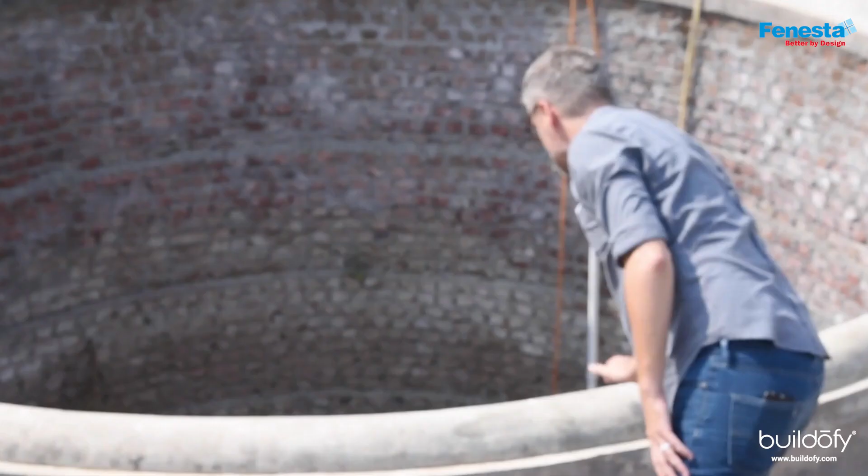One of the first decisions we made was to formalize that into an open well, not just to take the spring water that was coming along, but also to use that as a catchment. We implemented recharge pits throughout the site to help recharge the water table, and the more capacity we could build throughout the year to hold that water, the easier it would be on our resources.

We've actually been able to implement another massive rainwater harvesting pit that exists below the soccer field.

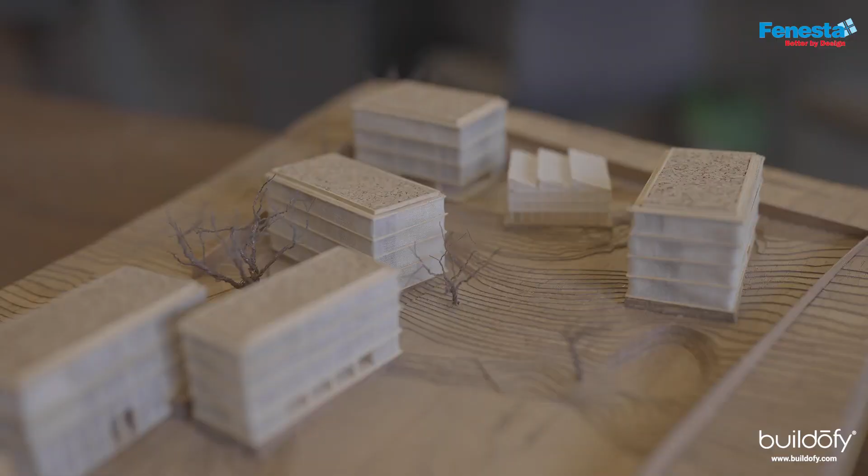What we worked out was a series of buildings that would sit, again as much as possible, following the natural contours of the hill, and the reason for that was to try and maintain as best we could the natural slope.

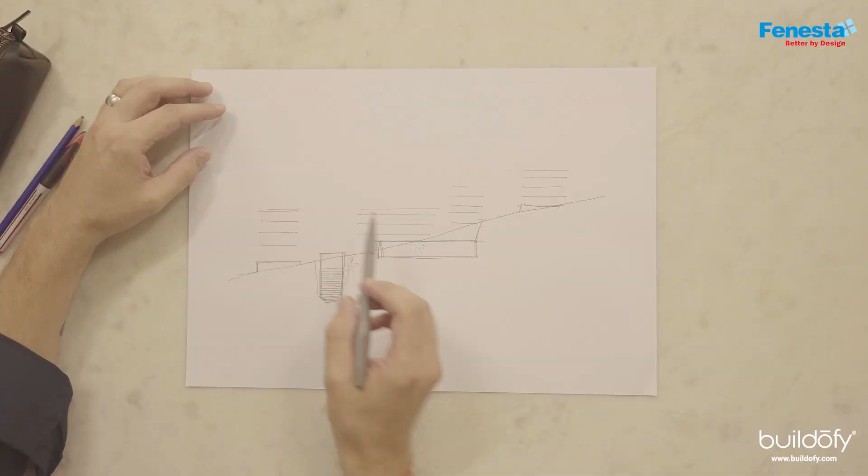Bedrock foundation of the site is fairly close to the surface, so any excavation we had to do was quite expensive.

The aspirations they wanted to accommodate greatly exceeded the FSI we were allowed to build, where originally we'd planned for 9 buildings. When we took those for plan check, very quickly we were cut back to, okay, this is too much square footage, you have to take this out, you have to take this out.

That's why we tried to look for ways to maximize what we could build in terms of how much of the verandas were counted in the FSI, outdoor spaces, double heights, things like that.

So there's dormitories, there's obviously washrooms, kitchen, cafeteria, things like that. And then in the academic program, there's a library space that has sort of become this multi-purpose space. They play football there, they play badminton, they have poetry recitals and concerts.

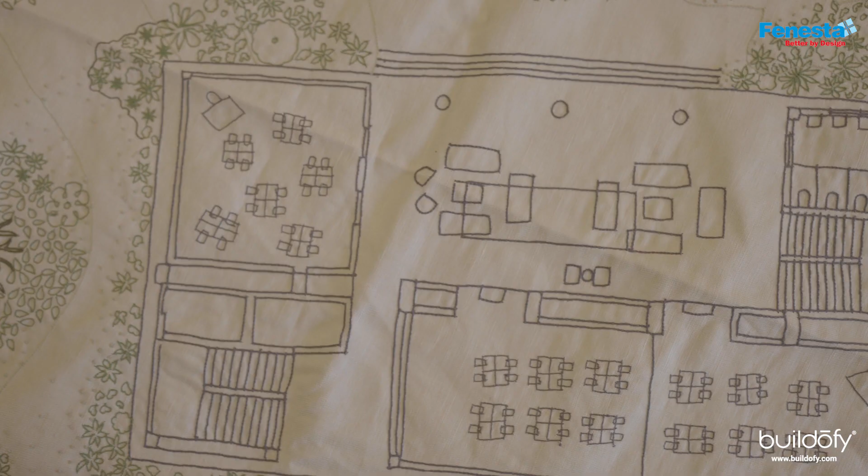The program, I don't want to say it was conventional, but for us what was paramount was trying to maintain flexibility, to enable them to create a variety of spaces in terms of scale and function. If you imagine each of the classrooms as a cell, those are somewhat standard, but they were sort of infinitely reconfigurable.

On every building, the lower 2 floors are academic, and the upper 2 floors are residential. Throughout the campus, we wanted the dormitories and the classrooms to be in every single building. You have every part of the campus active at all times, so it's stratified vertically.

A lot of the studies we did found that the very typical campus plan has a residential zone over here and an academic zone over here, and they never interact with each other. In cities, when you segregate office space from residential space, the residential space in the daytime becomes a dangerous place to be, and the office space at nighttime becomes a dangerous space to be.

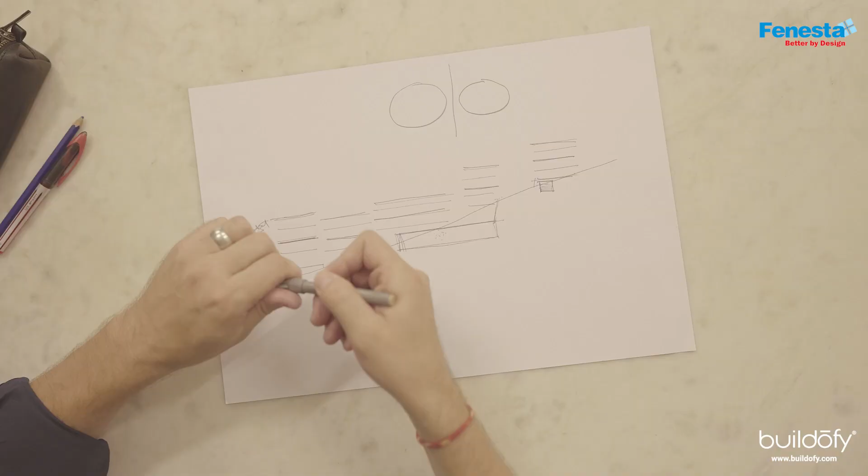So we wanted to unify those, so that at the very least, in the diagram, they would stack this way. Obviously there'd be some amount of overlap, but they would be spread throughout the campus and therefore energize every corner.

Knowing that this would be the first time living away from home for most of these young women, we wanted to create a greater number of smaller buildings, rather than one concentrated campus with wings. We wanted to create separate buildings that the girls would move through a landscape to connect to at different times. With the dormitories especially, I always joke it's the Harry Potter method—you'd have Slytherin here and Gryffindor. By having these smaller groups, the bonds would be maybe that much stronger.

The first one we built was science, technology, engineering, math. The library is here, this is the leadership center. There's a cafeteria and some classrooms in the lower floors of this one. This one is kind of arts and humanities.

We know that it is an institution, but at the same time we didn't want it to feel institutional. By having these very simple, kind of dumb boxes—a very basic column beam slab structure, pre-stressed post-tension slabs—we tried to make a series of modules that would be efficient for both classrooms and dormitories, and circulation of staircases. The leftover spaces we've tried to work out as verandas.

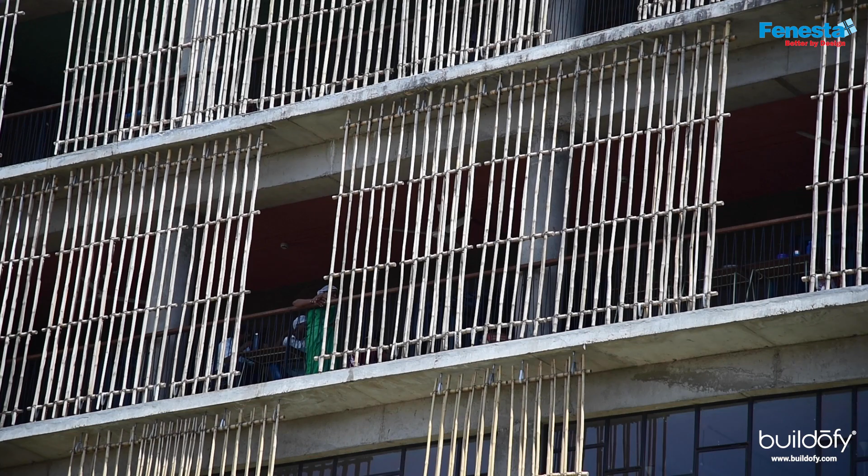We were really adamant to do single-loaded corridors rather than double-loaded, to get as much natural light as you can have. The bamboo screens were a way to mitigate some of that in terms of shading and privacy, but to still have these open verandas that would connect everything and really become the fabric of the shared experience.

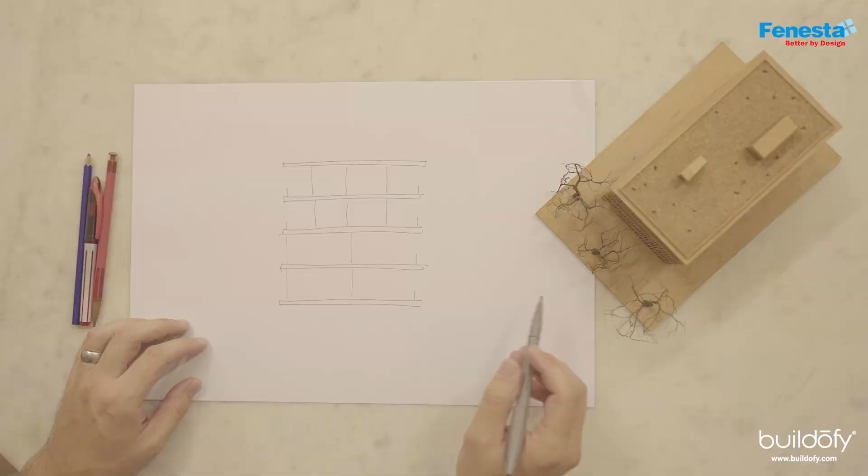The building is basically divided into 4 floors. Generally on the south side, we would have the veranda spaces. On the upper floors, we would have the dormitories, and those dormitories had single-loaded corridors on both sides. Again, working with the slope, this would be the downhill side, and this would be the uphill side.

We were fortunate enough to work with Pratik Raval from Transsolar in New York—they're climate engineers. We started to engage with him on how we might make this a little more passive in terms of energy consumption, and he actually suggested that we could do the entire campus without any air conditioning at all.

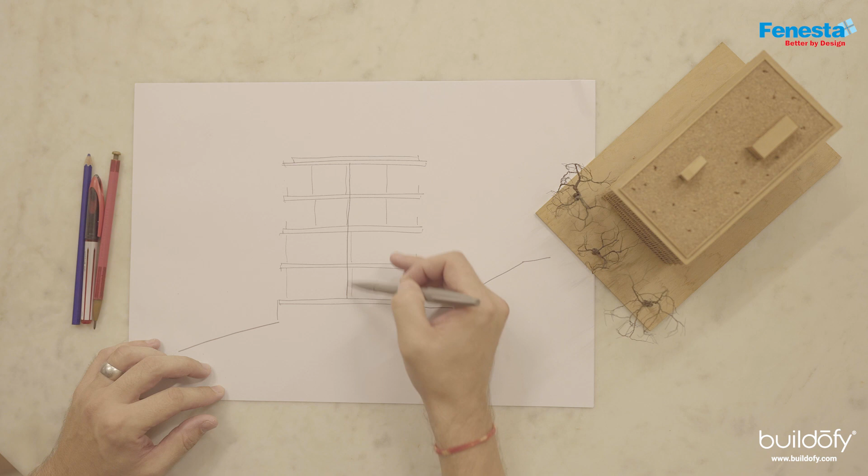The best, or easiest way we achieved that was to take the building and split it down the middle, and rather than have columns on the outside and a row of columns in the center, we built a double wall throughout the middle of the building, which enabled us to have an open shaft for air circulation. What that effectively became was the idea of a solar chimney.

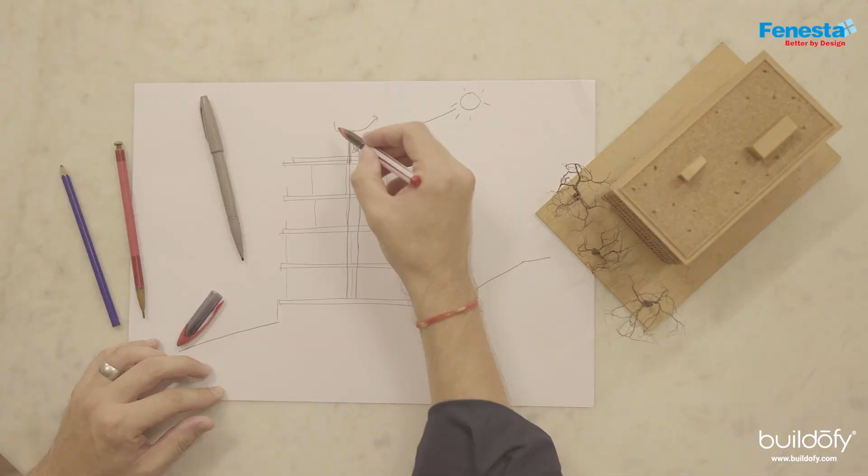The sun heats up this vertical slab on the rooftop, concrete on one side and lined with glass on the other three sides. That creates a convection, so we have hot air escaping from the top, and everywhere we wanted to evacuate air from an enclosed space, in the dormitories and classrooms, we could just create an opening in that shaft, and the air would be drawn out through convection, pulled out from the roof.

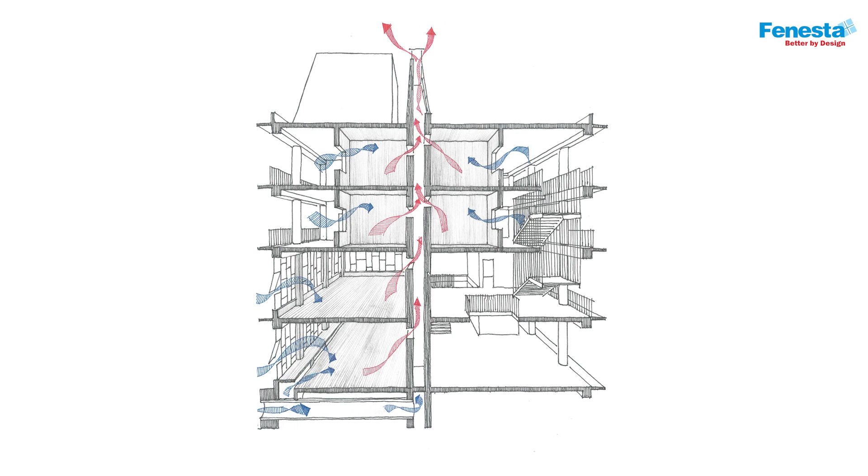Now, obviously, if we're drawing air out, we need to be able to draw air in. So at the upper levels we created standard windows into the dormitories, all with openable windows and mosquito screens. By having the verandas on the south side, you limit the solar influx, protecting your classrooms and keeping those shaded to the north side.

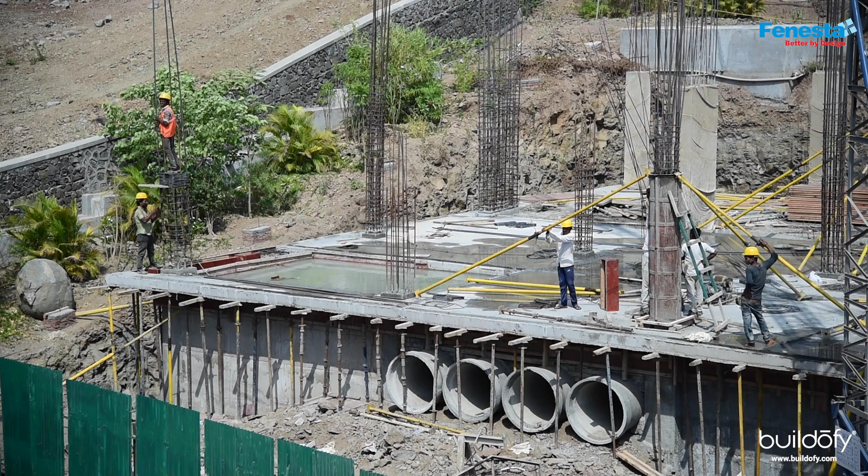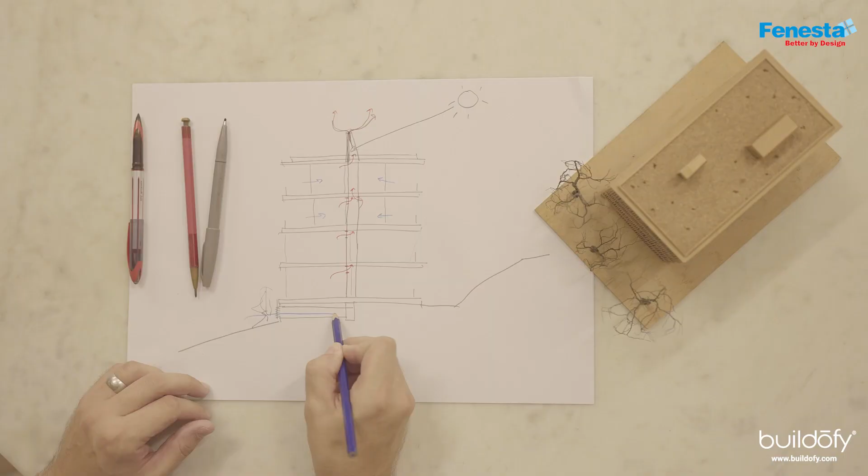Underneath the building, within the width and depth of the foundation, we created a series of hume pipes, massive concrete tubes that sit between the footings. By putting those on the north side and planting vegetation in front of them, they're shaded because of the sun direction, and they get a bit of humidity from the plants. By watering those plants in the morning, cool air is drawn in through those pipes. In the center of the building, it turns around and comes back. The greater length you have, the more exposure to the cooler temperatures that exist naturally in the foundations of the building.

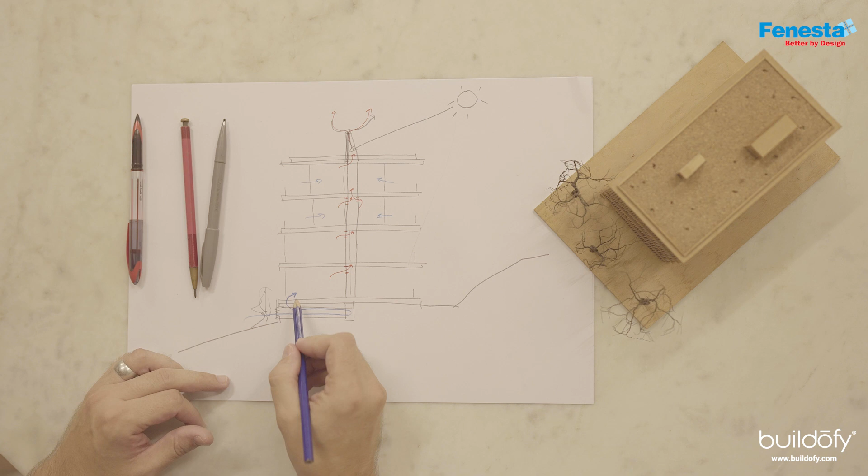The air drawn in from outside is cooled further, and that comes into the classroom at floor level, with standard ceiling fans in each space. We also figured out ways that on the first floor level those could come in to this side, and by having those ceiling fans mixing that air, you basically got a passive air conditioning system.

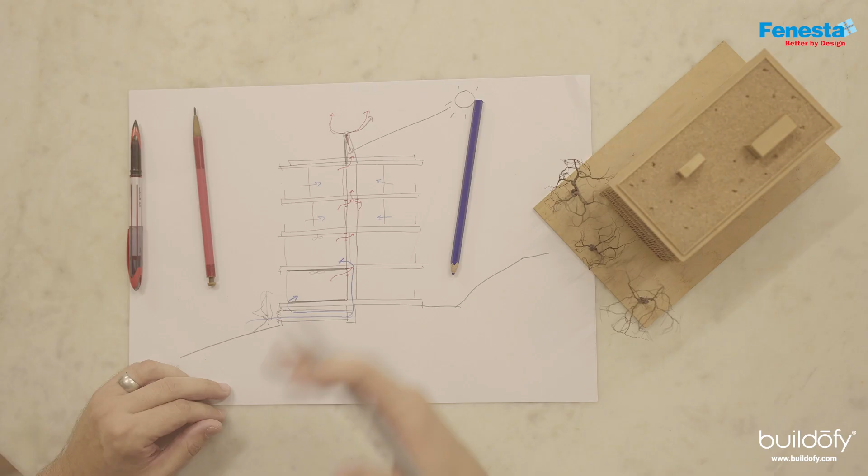What we realized quickly is that if we left our ceiling exposed and used masonry floors—be it IPS, cement screed, or the marble mosaics we used—the thermal mass of those two elements would create a kind of negative battery. Pune, especially this part outside the city, has a significant temperature difference between day and night, even throughout the year. By cooling those spaces off, those slabs in the floor and ceiling would have the potential to absorb heat, whether from the sun or from the students throughout the day, and keep the temperature comfortable.

When the classrooms were no longer occupied, they would cool down and be recharged for the next day.

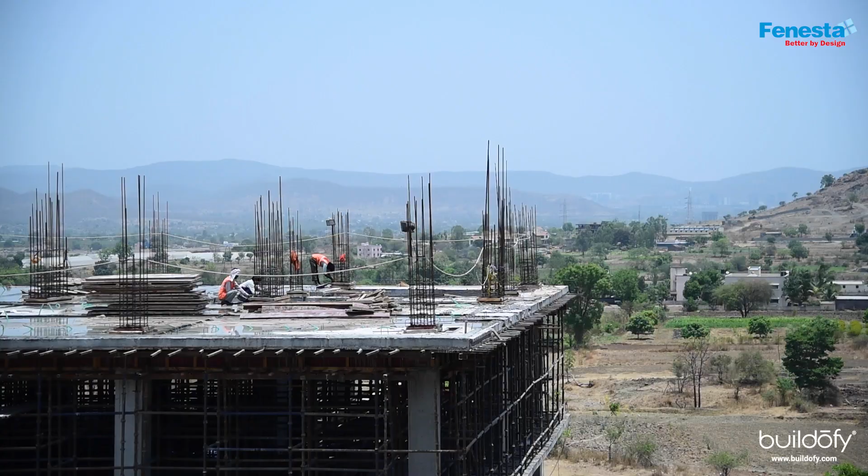Given the price constraints of the project, we knew concrete would be something we had to live with as a material. It became the most efficient way in terms of local building technology, affordability, and the sizes and spans we needed to achieve. We know it's not the most sustainable material given the air pollution its production causes, but given that everything was locally available, it just became the way forward.

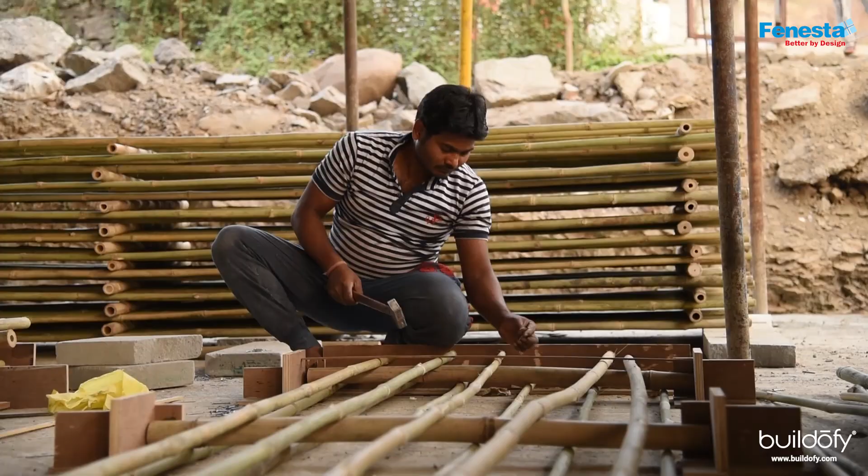To mitigate the impact of the concrete, we tried to look at more local, more natural materials. We made the bamboo screens, hand-tied from locally sourced bamboo, and worked with local artisans who had knowledge and expertise. Malakar Mama was invaluable in that research and development.

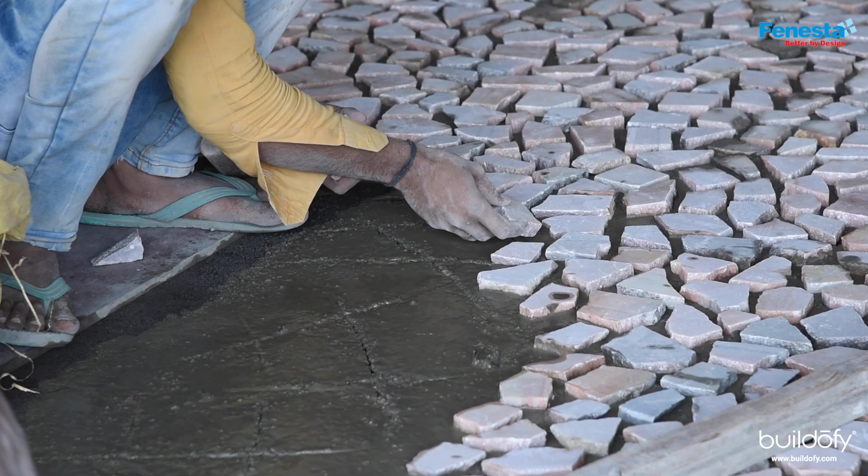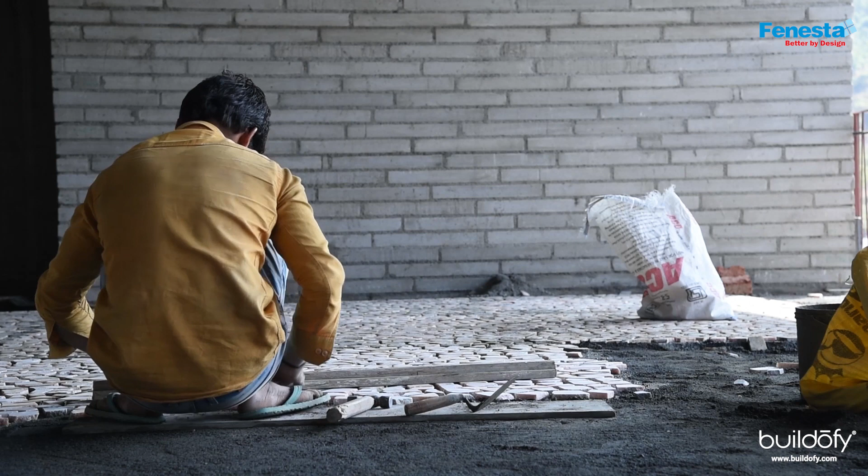We worked a lot with recycled or reclaimed material, things that would otherwise be wasted—offcuts from tile shops or wastage from quarries, including all the beautiful colors you see in Rajasthan of the different marbles. We could generally get them at almost no cost, or just the cost of transportation, which let us invest a little more in the artisans and the craftsmanship.

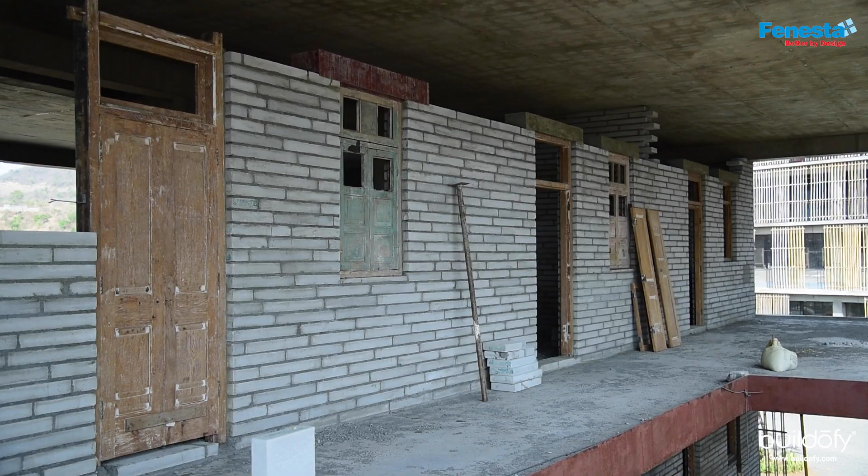The partitions for the walls are made out of recycled fly ash from industrial waste. We didn't even plaster them, they're just laid in a very careful way. Because of connections that Rupa had, we were able to get them at a large discount, so we actually laid them horizontally to get these broad courses, which not only looked nicer in our opinion, but also helped with insulation, both heat and sound.

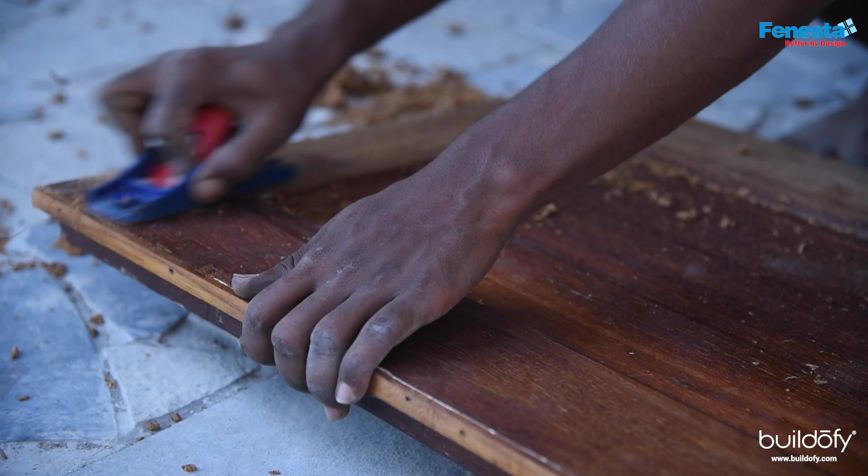We got 80 doors from an old school in Bombay that was being torn down, and the cost was basically the same as buying newly manufactured synthetic composite material, aluminum and fiberglass or whatever those materials were. When you scrape all the paint and realize underneath it's old Burma teak from 80 years ago, it has this richness and material quality. So the challenge for us became: how do we make all of these mismatched elements come together and work?

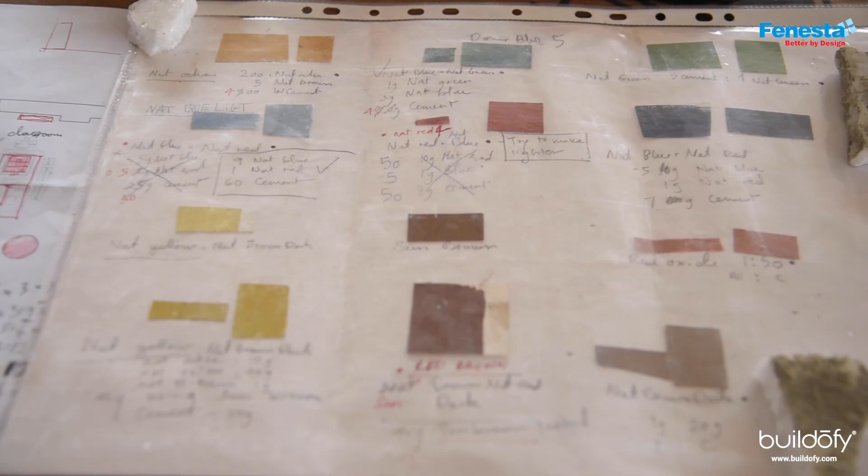The integration of color, all credit for that really goes to Milena Bach. She's the one who said, no, actually we shouldn't paint the walls. We should leave the walls the way they are. The color should be on the ceiling. And it should integrate with the landscape, and it should be a kind of wayfinding device, and it should give a sense of place so that no two spaces have the same palette.

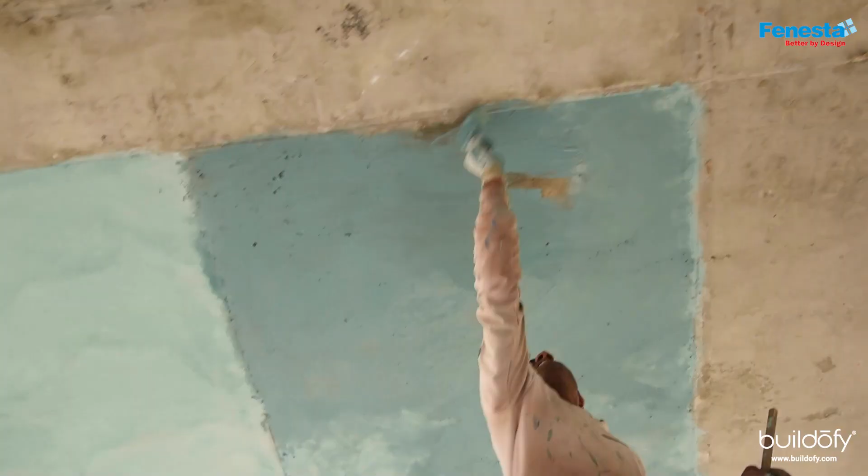She came here and worked with Dwani, an architect on my team at the time, and they developed, using local pigments, oxides, and things we could get in the market here, their own kind of paint. It's basically pigment, cement, water, and a series of binders. It's kind of a material unto itself, so it has depth, thickness, texture, and the girls have really responded to that.

The furniture was something we knew had to be flexible, durable, robust. We wanted it to bring an element of color. Paint would be something not just desirable in terms of color, but also an affordable finish on the steel.

We wanted them to be lightweight and transportable, so two girls could easily pick up and move a table. We tried to design them so they could fit together in a cluster of 3, 4, 6, whatever. You could make them in a row, in a circle, or take the sort of nominal Roman camp version of students in a row.

We wanted to create a series of benches and chairs for the library, using a reclaimed material. We found in Panipat in the north, where there's a lot of textile industry, places making threads and ropes out of industrial waste left over from weaving. You can get these same ropes made out of things like potato chip wrappers and cellophane. So we looked at outdoor furniture using these too, since the plastic would perhaps behave better. Paul Michelon, a designer who worked with us at the time, made these very beautiful long benches with a wooden plank at the base and a woven back.

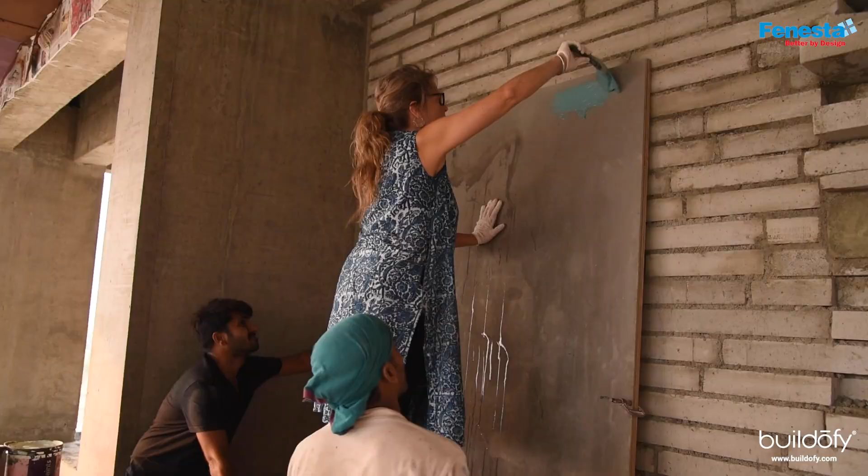The first year, in another part of the valley, we created a small annex where the first batch of girls started, just 3 simple classrooms in a kind of old manager's building. But once the first building was ready and the girls came on campus, the whole space kind of came alive.

You can do what you want as an architect, but until it's inhabited in a rich and meaningful way, you don't see it fully. The light and the energy that these young women have is incredibly inspiring. And Rupa kept asking for this sanctuary for learning, and I hope we've created a foundation for that.